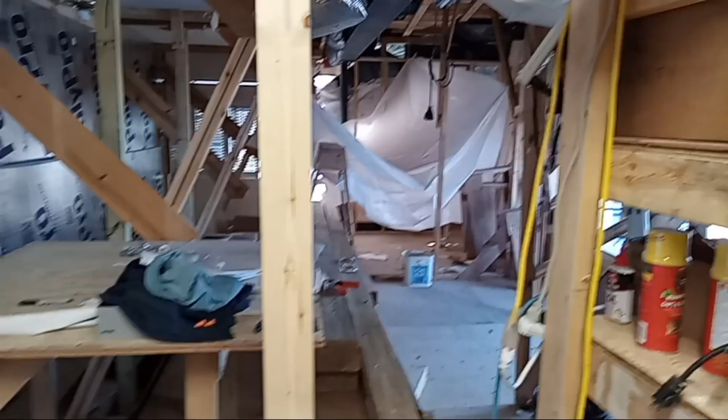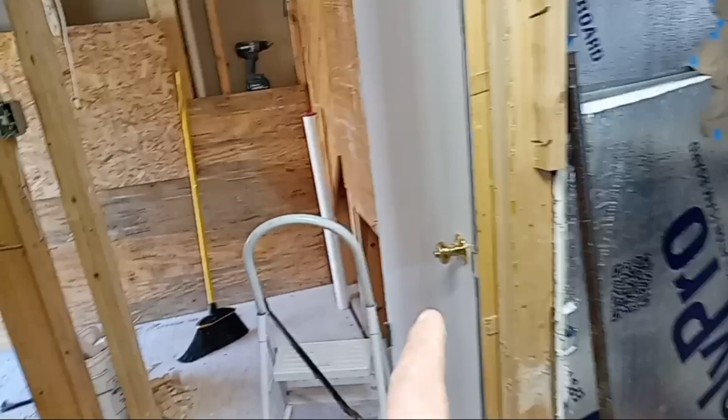All right, so this is the main living area, and this is the bedroom door coming into the river bedroom. This used to be the closet for the river bedroom, and this was an exterior closet where we held beach stuff, umbrellas and life jackets and crap like that. This was an unconditioned room.

However, this wall and the other wall had zero insulation in them, and there's zero insulation behind this. So this used to be an exterior wall to the house. This was a window. The reason I'm tearing apart this right now is because I want to reconnect the water to and from the water heater.

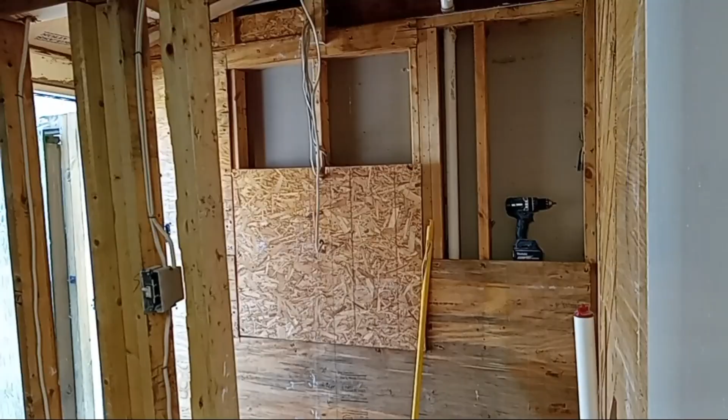The water heater is right behind that light switch, and so I need to take this piece of plywood off and this piece of plywood off, and that will expose the pipes coming up and down from the water heater and the washer or dryer.

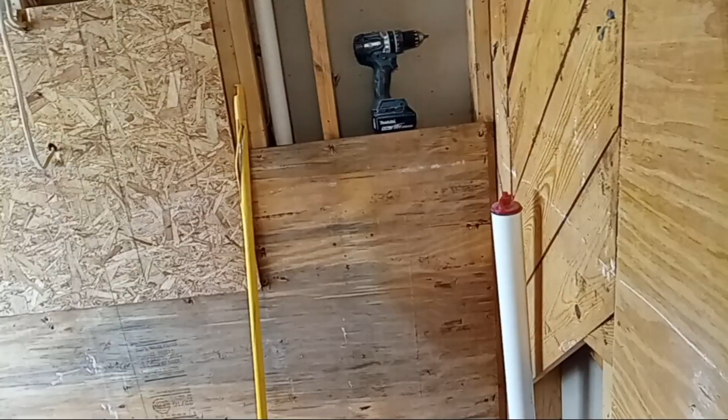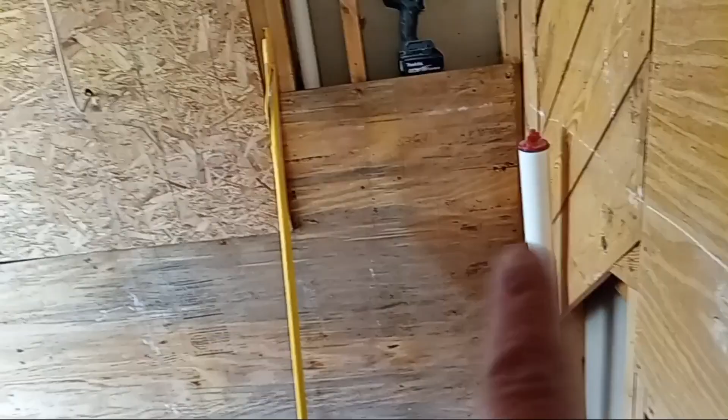Just a washer supply, which I want to hook up to, because when I cut the supply line underneath the floor out there, that killed the washer as well. So I'm going to be hooking up some flexible hose between that point where I cut it and the washer and the hot water heater, so I can restore those.

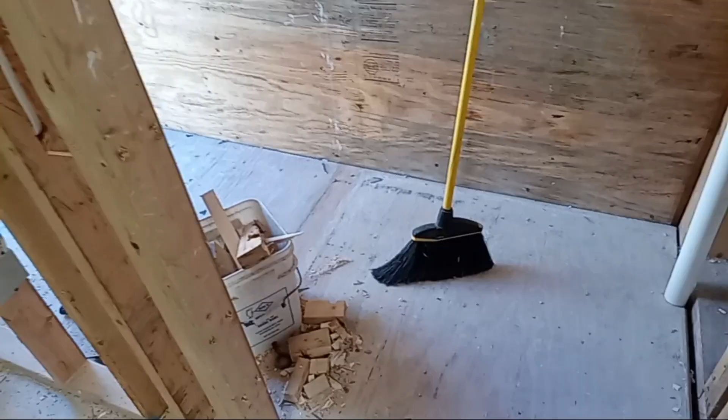Since I'm going to be here for almost a week, it would be good to take a shower. Anyway, I've been demoing this area here, and this floor already has insulation under it. This is the crawl space, and this is the limit of the crawl space that I was insulating. Here's the plumbing that I put in.

Beyond this, I'll be rebuilding virtually the entire floor, going from here all the way to the street side of the house. Because this is the original old part of the house, and it was built funky. Whereas this area here was built in '95, so it was built reasonably well. Anyway, that's what I'm doing at the moment.

All right, after getting the piece of plywood off, there was insulation in here, just not where the window was. But I was able to run my 1-inch ID tubing through a hole in the wall coming out of the washroom. So cold water has a valve and a T going to the clothes washer. The hot water is not connected because I had to disconnect it.

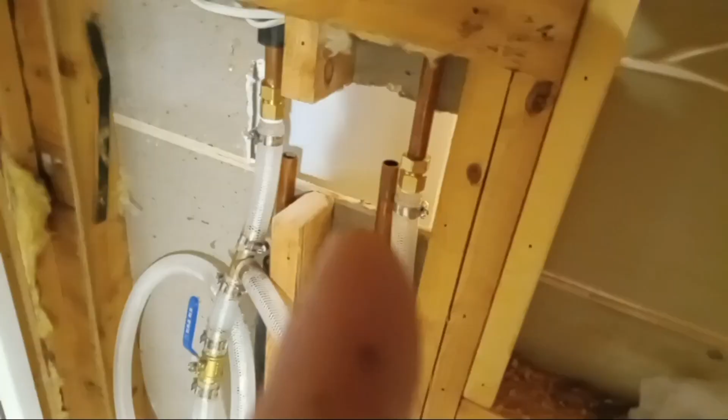I had to run the tube to the hot water too. It turns out it was the hot water pipe that had burst, not the supply line. So I had hooked up the supply line, and then it was still leaking. So I had to run this.

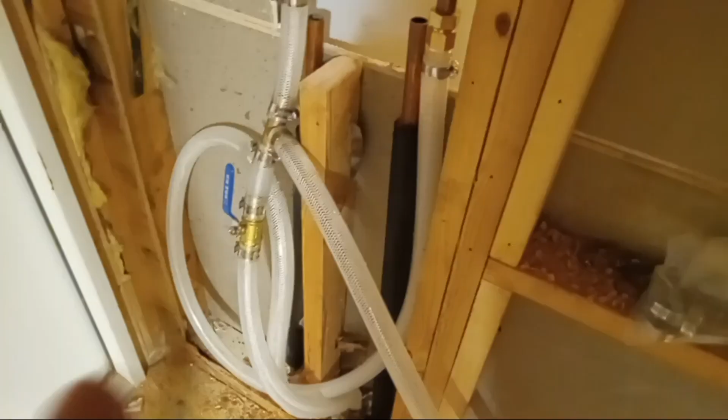Unfortunately, running the supply line took like 3 or 4 more feet than it should have. I only had enough to do what I've got right here, but I've got an extra loop there for the hot, and that wasn't enough to reach over to the washer.

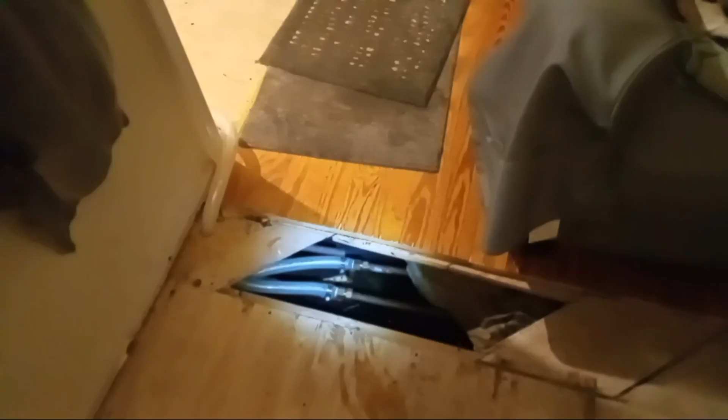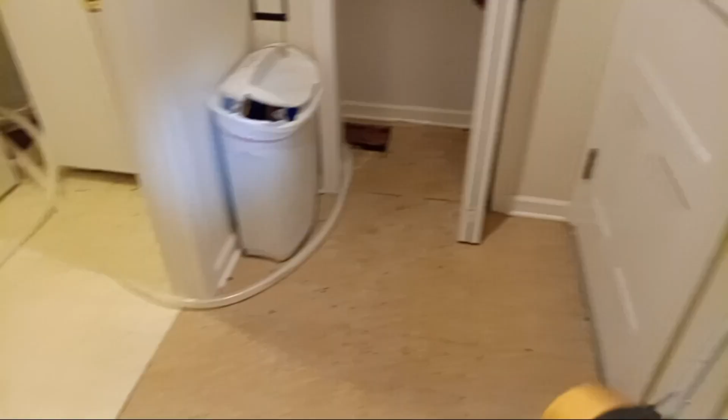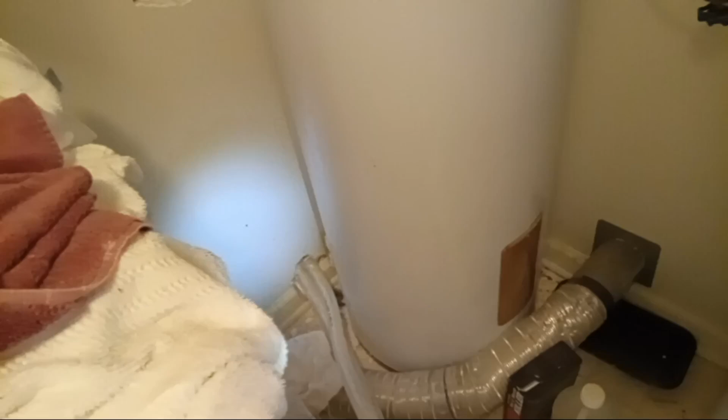So here's where I tapped into the supply line, that's the far line. The close line is the hot return back to the house. For the hot return, I didn't have enough pipe, so instead of running it underneath the floor and coming out that hole like the supply line does, the hot return just comes in here and goes around, into a hole in the wall, and then joins with the 3/4 inch copper.

So anyway, that'll hold for a while, and I can take a shower. I can do laundry with cold water, better than nothing, and I'm good to go.

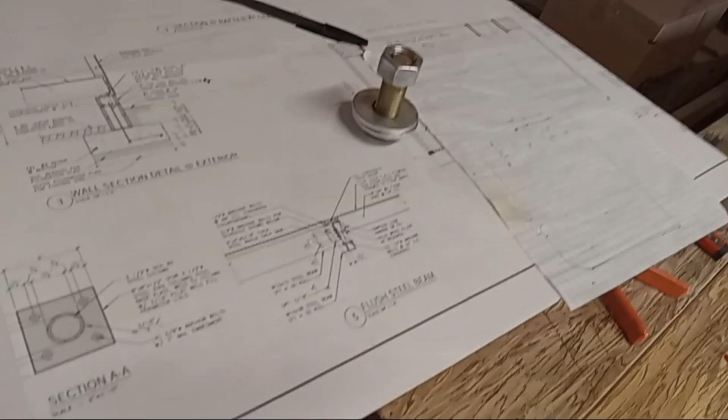All right, folks, so first task for today is to build the filler for the I-beam. Sorry for the poor light.

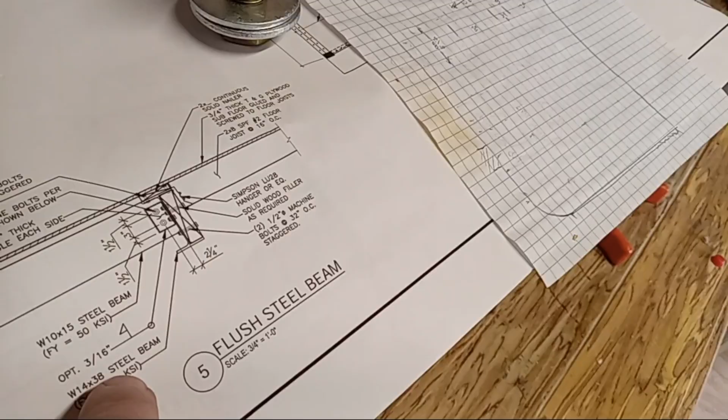This I-beam is actually specified here as a 1438. It's actually a 1054 — 54 is the weight in pounds per linear foot, and 10, the W, is how tall it is. So we need to fill in this right-hand X part of the beam with wood.

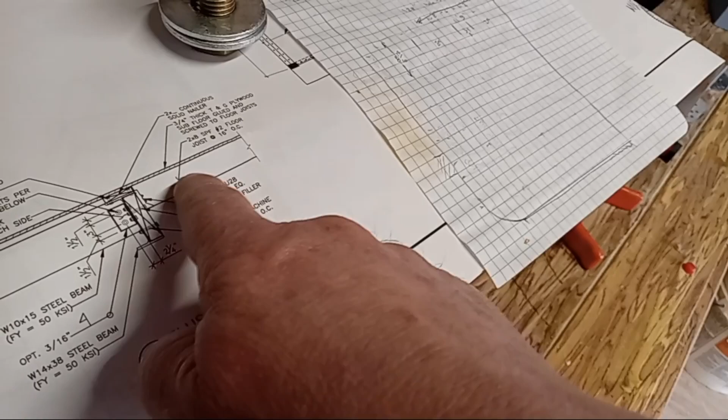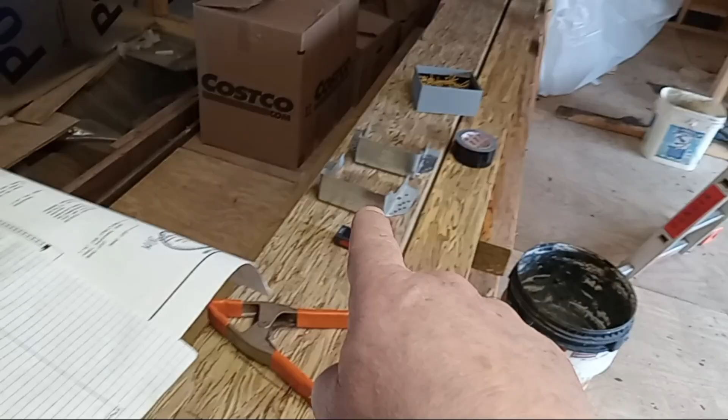However, instead of using the 2x8s, I'm going to be putting these PSLs, which are right here. These are 5 1/4 by 9 1/4. So these are going to be going off in this direction with hangers, hanging on those hangers.

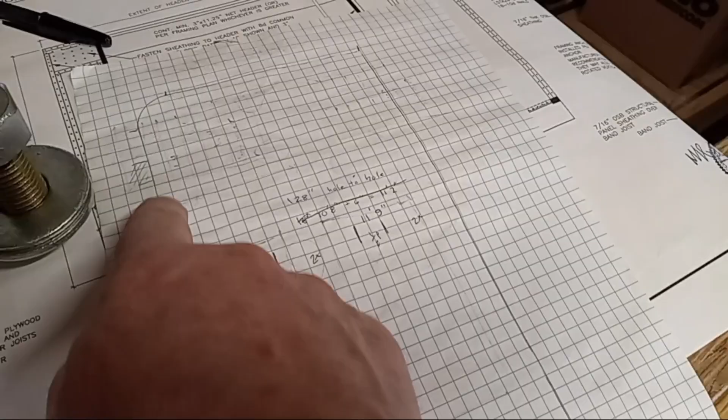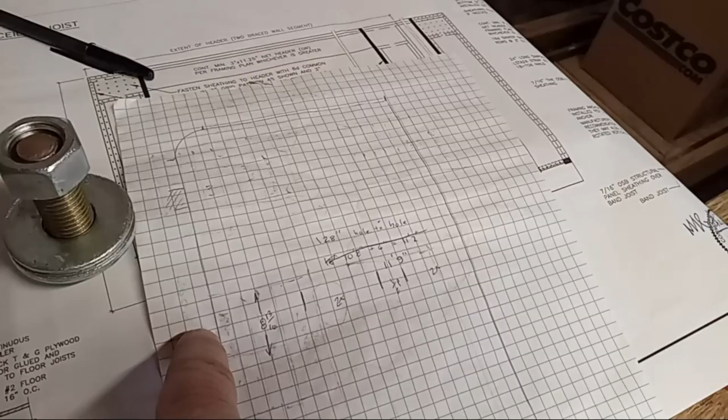Attached to this chunk of wood right here, I drew a profile of the inside of the beam coming in here. This is the inside of the flange, and then it's got a fillet, flat for about 8 1/2 inches or so, and then another fillet, and then the underside of the top of the flange. And then there's 1/2 inch holes that will bolt this chunk of wood to the webbing of the I-beam. I also have to accommodate the 8 bolts that are holding the I-beam.

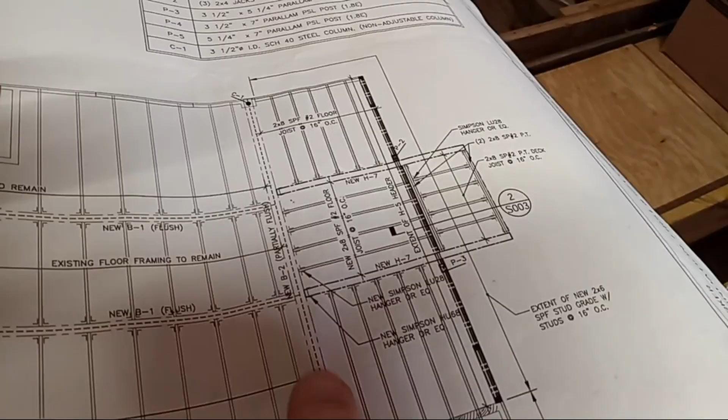Let me pull up the page here. So this is an I-beam that comes to this main beam, and there's 4 bolts here and 4 bolts here. So the heads of those bolts - here's a bolt and washer combination. So at each joint of the 2 sets of beams, we've got 4 bolts.

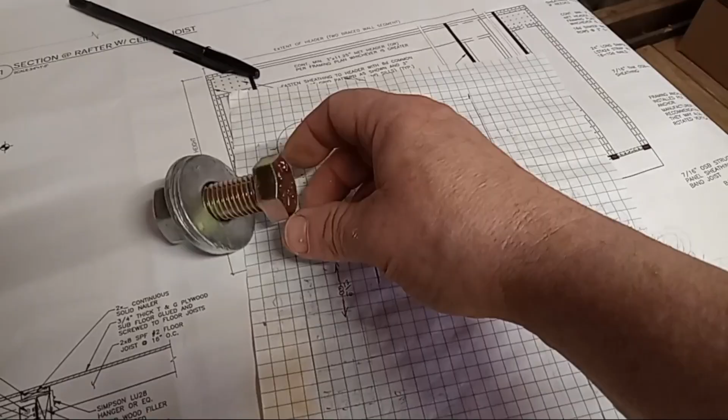So I need to bury these heads in this chunk of wood because I'm not going to be able to get at the heads. This chunk of wood is 11 feet 9 inches long, such that we have the 7 inch bolts. These are the 1/2 inch bolts that secure the wood to the I-beam.

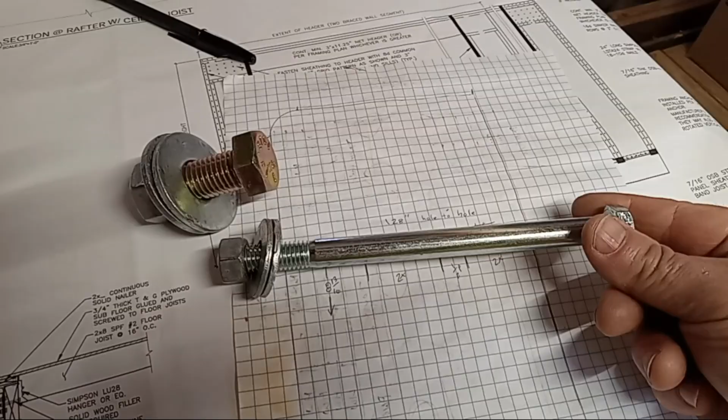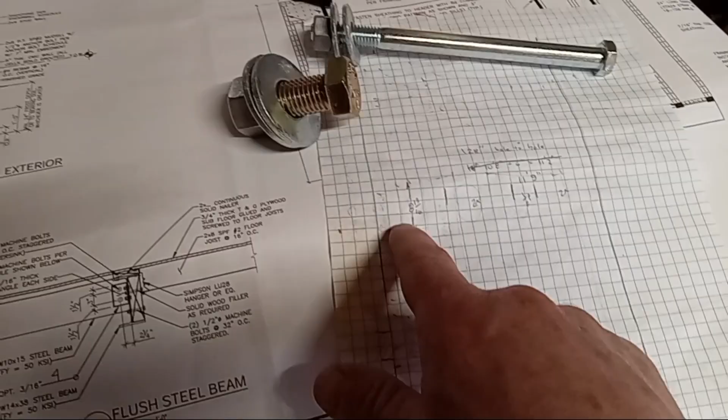So I obviously am going to be bolting the wood into the I-beam with these, but I won't be able to get at this head to hold it while I tighten the nut. So I need to make another piece of wood, and I'm going to make it out of 3/4 inch plywood that will sit against the webbing and retain and keep this head from rotating. So that's what I'm going to do next.

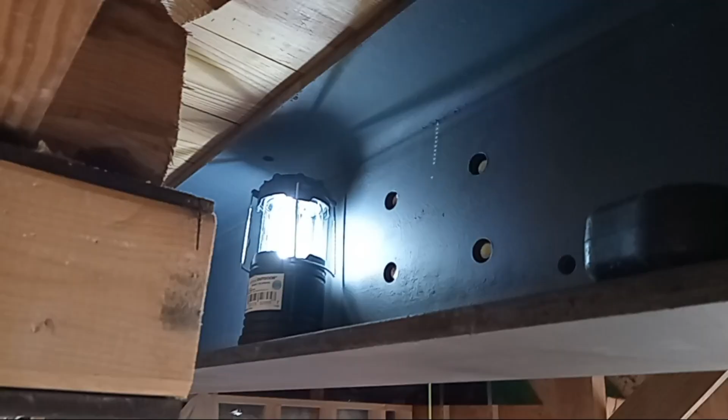However, they do go through those 4 holes. But if I come over here and take a look, these guys are not matching up all that great. So, yeah, what I think I'm going to do is make them fit here in the board on the other side, and then when we go put the I-beam in here, if holes don't align, we're just going to file and grind them so that they will go over the bolts. That's this whole pattern, and the pattern on the flanges is off enough that I can't find a common position for all 4 bolts that fits both at the same time.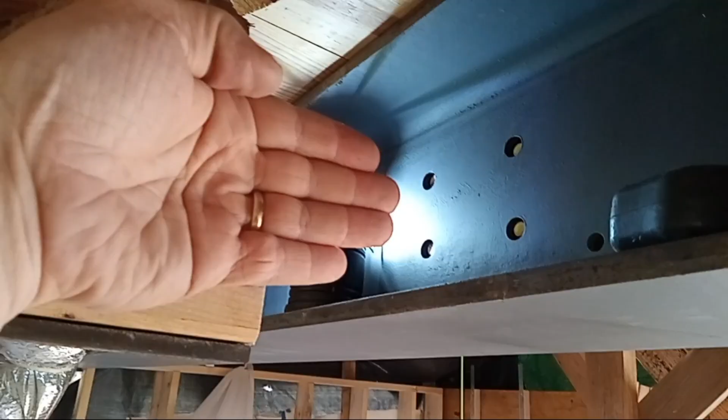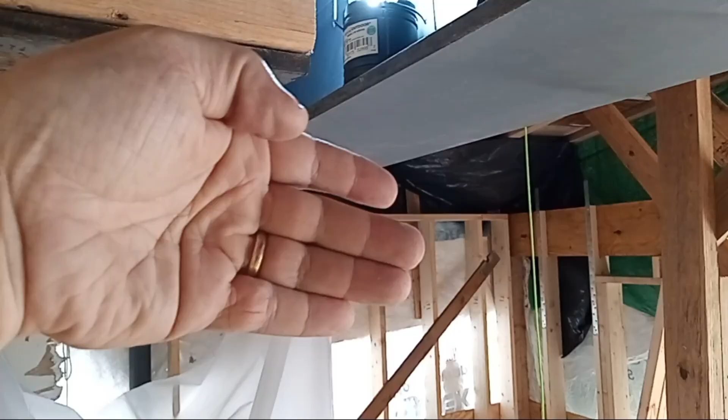So that's a problem, but it's not insurmountable. It's just that actually I think the pattern - well, yeah, I know the pattern on one of the flanges is off by 1/8 of an inch. One of the holes is. So we'll just make it work when we get to that point. That'll just be a big pain in the butt. We'll have to fit the I-beam, see where it doesn't fit, mark where we need to trim, then back the I-beam out and tilt it down and let it rest on some structure, and then grind the holes, and then lift it back up and put it back in. The I-beam is not so heavy that I couldn't do that by myself with my shoulder lifting it.

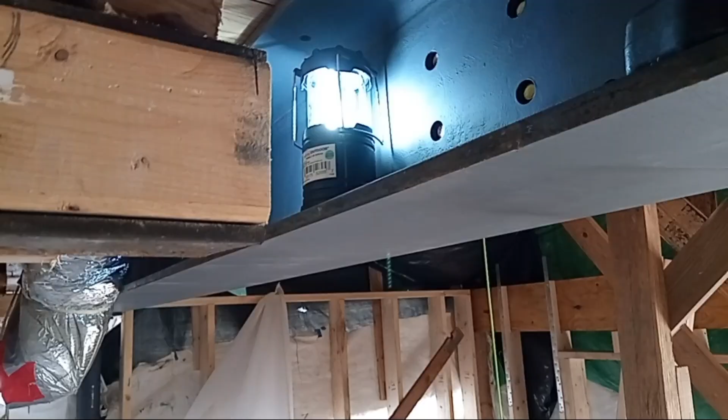Especially depending on where I put a fulcrum in the middle, or a fulcrum somewhere here with a roller or something like that lets me slide it easily back and forth. But we'll come across that road when we get there. Anyway, time to press on.

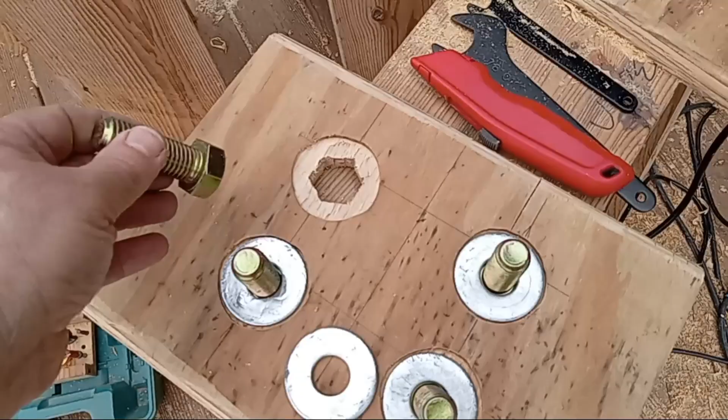All right, here's the final iteration for the first one. So we have recesses for the washers. The bolt heads are through holes, so again there's no wood in between the bolt and the web of the I-beam. This is purely meant to retain the head so that it doesn't rotate when I try to tighten the bolts or the nuts on the other side of the webbing when I'm attaching the I-beams going toward the street. Anyway, got to do this one more time.

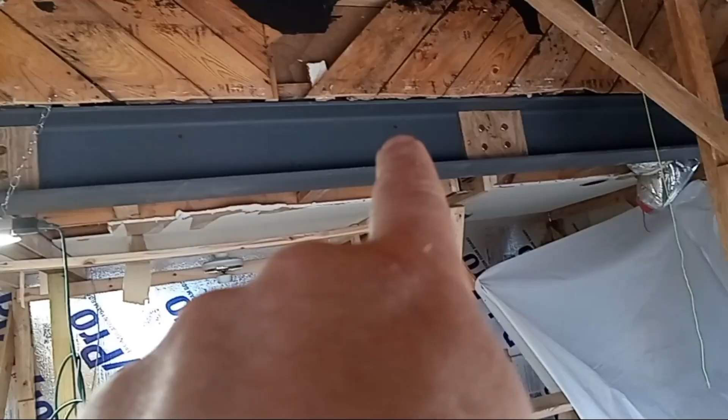All right, I got the two bolt plates fitted. So now it's time to make basically a 2x8 that goes across all the holes. You can barely see there's a hole there, and a hole there, and a hole hidden by the flange, just above the flange. So those are the 9 bolt holes that will secure the filler to the I-beam, and that's what the PSL is going to hang on.

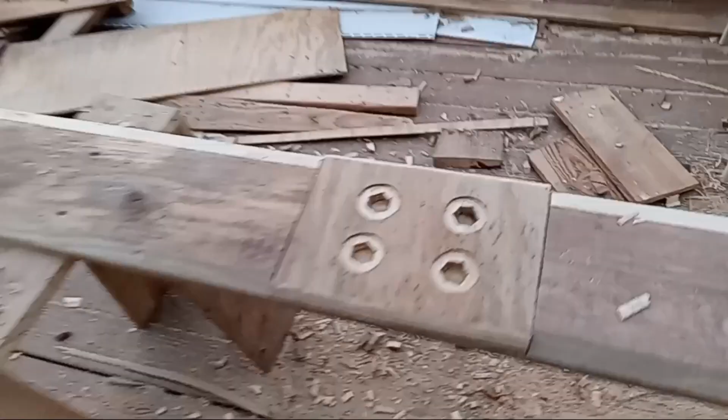All right, folks, I got the first bolt plate fit, so this guy goes on here. So this right here is a joist that I pulled out of the main living area when the joists were on 2-foot centers, and one end of the joist was against the rotten sill and rim joist. So this is a 2x8, which in this case is 7.5 inches, whereas normally 2x8s are 7.25.

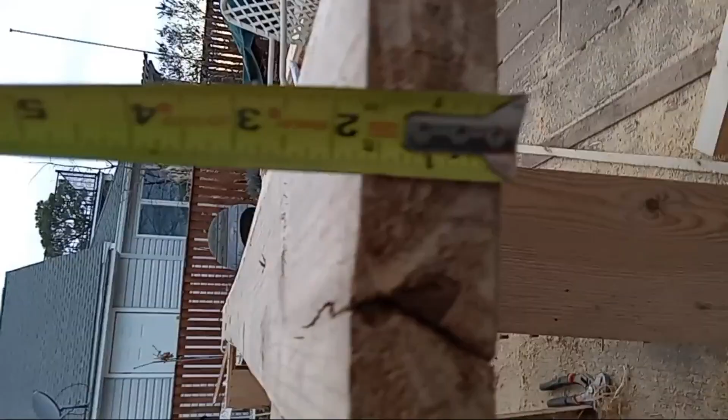This is also a little less than 1 3/4 inch thick. So let me find the tape measure. Here it is. So if we come down here to the end, it's upside down, but it's more than 1.5 inches, more than an inch. It's 1 inch and 11/16. So the fantastic thing about this is that 3 of these put together make 5 inches, so I don't need a 1/2 inch piece of plywood in my sandwich.

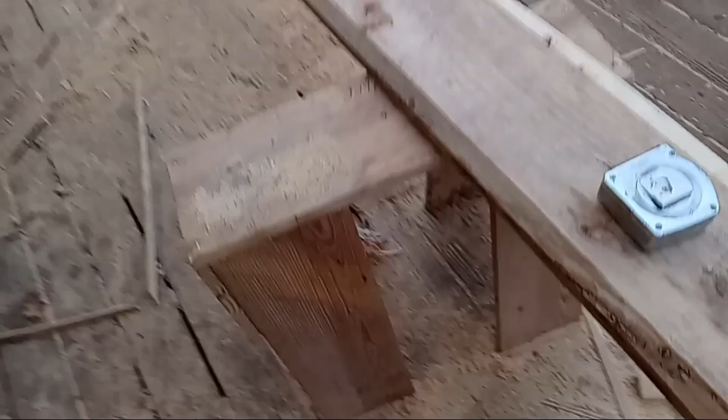So here is where the other bolt plate goes, between these marks here. So I'll cut that out tomorrow morning.

Yeah, so for this first one, where the bolt plates are, obviously this curve is a great fit inside the I-beam. So I just ripped off a 45 there, and then I added, this is about 1.5 inches, and then I ripped this guy down to the width of these guys. Now the 2 subsequent ones are going to be a little wider because the inside of the flanges tapers just ever so slightly.

But yeah, so when I cut the other guy down there, then I'll put everything back up like that, where that is, and this one where those bolts are, and then I can put this board up there and make sure the board fits in place, and then tack with nails through the big board into these plates to fix where they are, and then I'll screw them from the other side later. And then I'll also mark where the holes are so I can begin registering where the bolts go that hold this sandwich together to fill the I-beam.

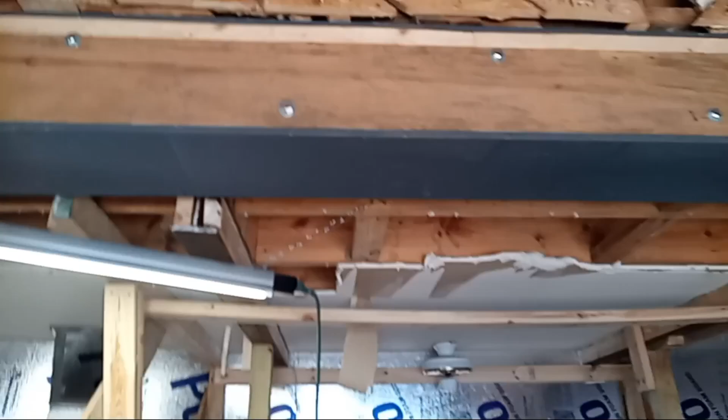All right, folks, it's in, man. The fill for the beam to hold up the 9 1/4 by 5 1/4 PSLs. So the PSLs are going just to the left. The center line of the PSL here is about a couple inches to the left of the center line of this I-beam here.

And then it's clear, it's to the right of about maybe an inch or so from the edge of the I-beam here. So the PSLs are not necessarily centered on the two I-beams that are going toward the street, simply because this load-bearing post is in the center of the house, and the chimney was not necessarily in the center of the house. So that's why the beams coming from where the chimney used to be are going to be off-centered a few inches from the PSLs that are the cantilevered porch.

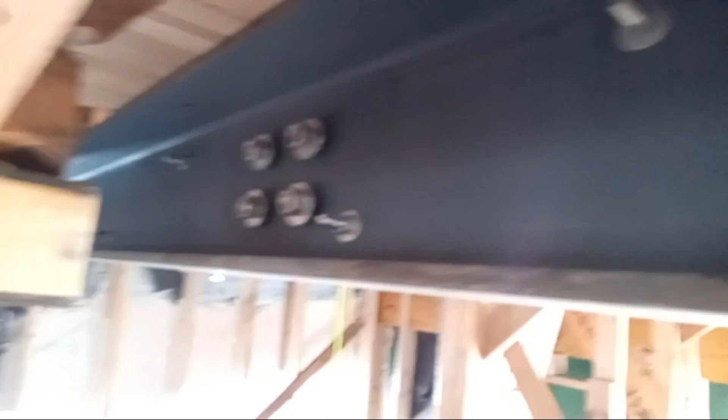So the other bolts for the I-beams are there, ready to accept the flanges of the I-beams. All right, on to PSLs.